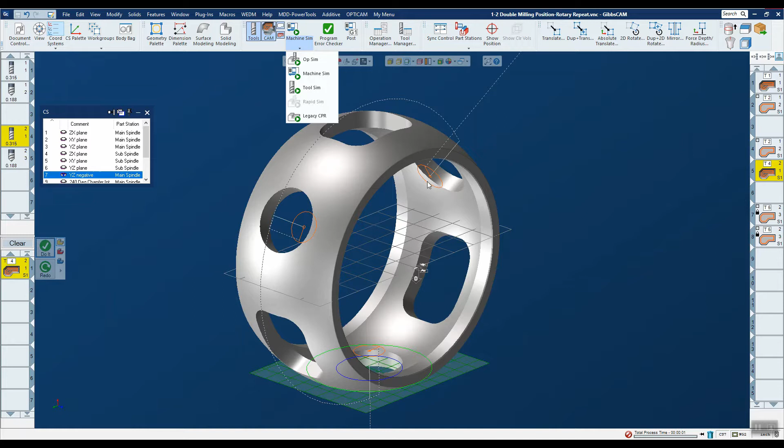Now in the same sort of way, I want to use the lower turret tool. So I'll drag that tool down onto the same process. This time I'm going to be using the opposite coordinate system, the YZ negative one that's defined here, and again make sure that I'm specifying that correctly. Now I'm going to pick the circular pocket geometry using the profiler as before. Okay, so now I've got that duplicated in multiple places as well.

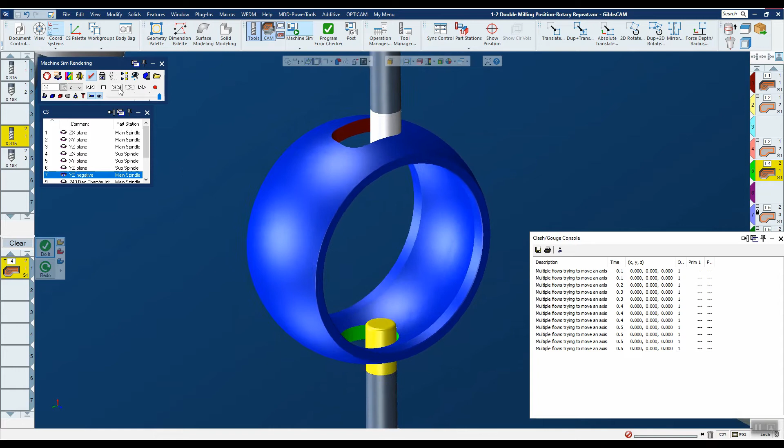Let's go into our machine sim. I have a stop put in, so let's quickly go to the area where we could potentially have some problems. You'll notice that we are getting errors in the console. What's happened is the first circular pocket is done; the top one is not. If I step through, we see the tool retract out of the circular pocket, and now it's going to index to the next circular pocket position and start that. The problem is that it's still machining up here, so the tool is going to crash. This is obviously not an acceptable situation.

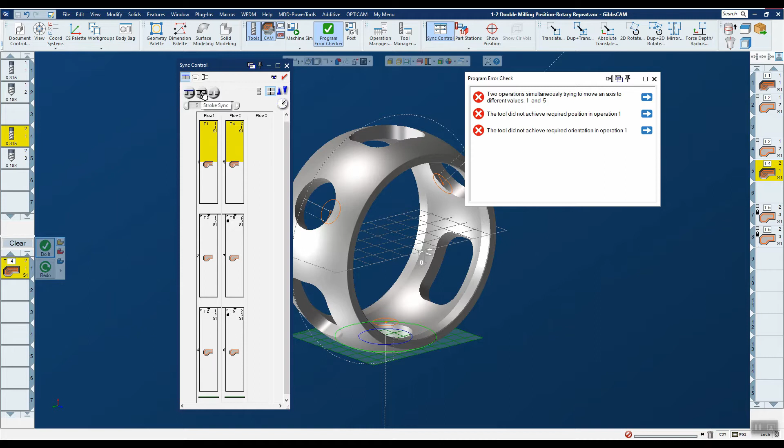So what do we do? Well, we have our sync control here. You'll notice that it is giving us some error messages. What we want to do is select the top portions of each one of these operations that I just created and put in what's known as a stroke sync. You'll notice that all the error messages go away. What it's telling it is that if one pocket finishes before the other, wait until the other pocket is done before you index to the next position.

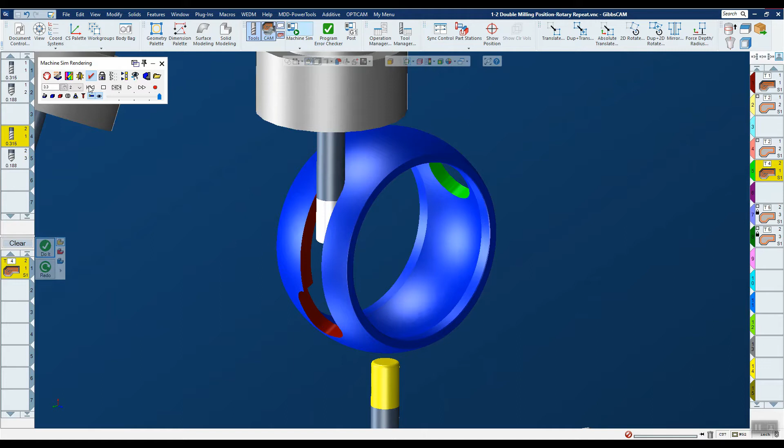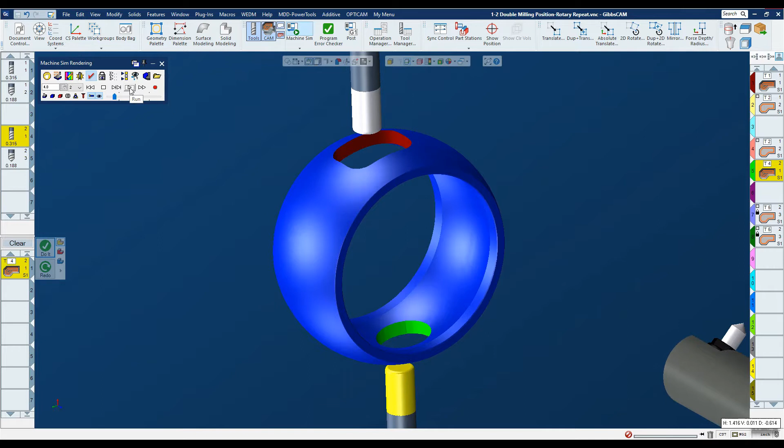Let's go back and see what happens now. I'm going to rewind my machine sim, go very quickly to the area where there's potentially a problem, and step through again. You'll notice now that it is holding on the bottom. As I step through here, the rectangular pocket finishes out. Let's slow this down a little bit and play it, and you will see the same sort of thing going on for the other 2 positions. So that sync control removed the crashing error that we saw before.

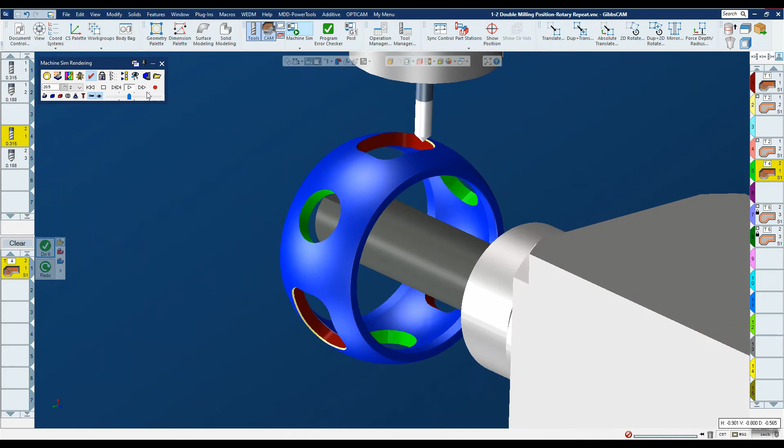By the way, other operations were done here for contouring to do the chamfering on the top and the bottom, as we see here, but the same principle was applied with the sync control. Okay, so that's the end of this example.

Let's go to another example. We're going to use a different process here: polar and cylindrical milling, mainly to demonstrate that this sync control principle can be applied for different kinds of operations. Let's start out by getting some geometry. We're going to do this slot here and the bottom slot here live so you see the entire process happen. So I'm going to turn on my edge selection and pick some geometry here.

And let's extract that geometry. All right, we have that all done. And I want this geometry to be relative to the YZ plane as the last example. And the YZ negative, we want some geometry that belongs to that as well. But let's start here on the top. So I'm going to pick this geometry.

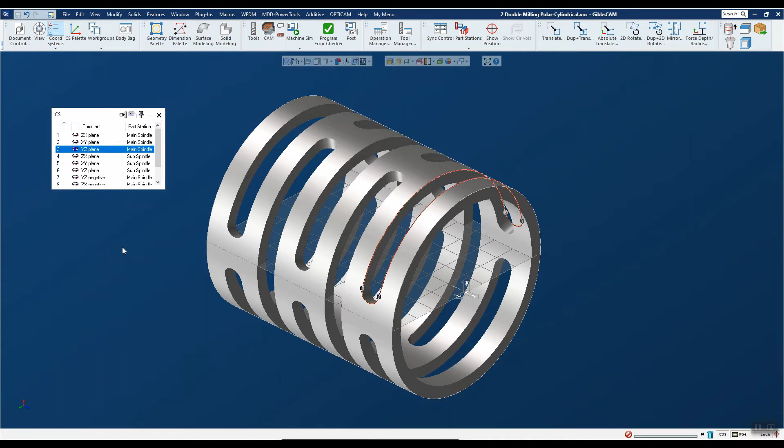And I'm going to go ahead and say, let's unwrap this. Okay, so when you unwrap it, you are essentially flattening it out. I want to do one other thing with this geometry. I want to split this line right down the middle so I have a good start point for this geometry. And that's a standard plugin called GeoEdit Split. Split it right down the middle. And now the geometry looks good.

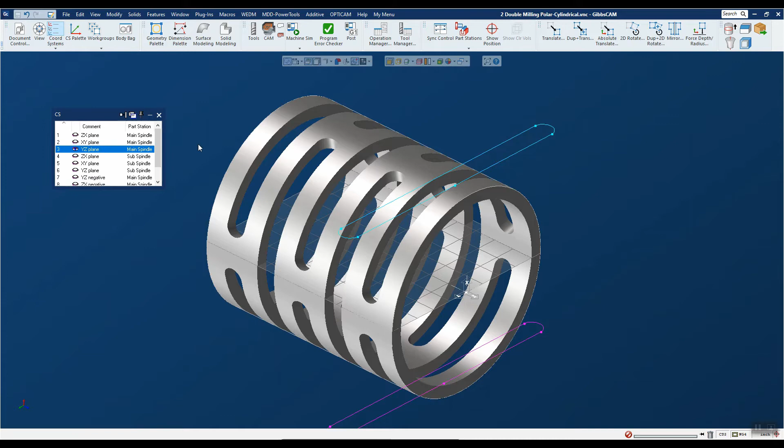I want to get the same geometry down here on the bottom. So a quick way to do that is with duplicate and mirror. Again, a standard function. And in the same sort of way, I want this now to belong to the bottom coordinate system. Great. So now we have our geometry all set for the top and the bottom for our polar and cylindrical milling.

So I have two tools. As before, identical tools in the upper turret and the lower turret. Tool number 1, tool number 6. We're going to start with tool number 1. This time we are going to do a contour instead of a pocket. And again, you put in some good values for both clearance planes and the top of the cut and the bottom of the cut as before. That's all standard stuff. Very important that we are machining from the correct coordinate system. So that's all set up.

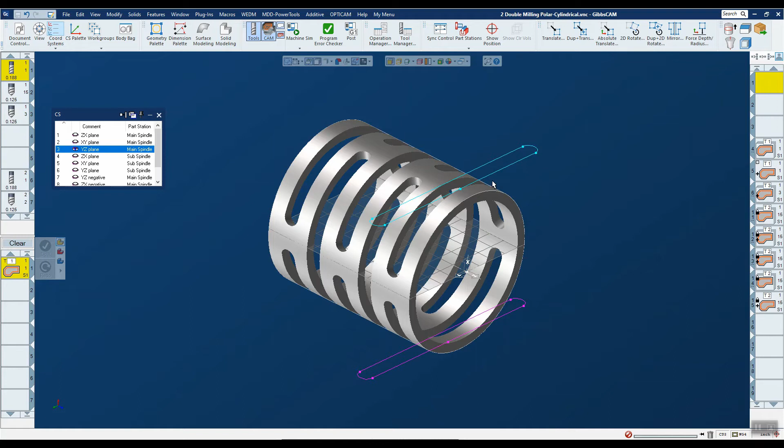What we need to do now is pick our geometry. And again, I want to make sure we start right at that point. We are going to be doing a climb cut on this. And you can see that because we picked the polar and cylindrical milling option, it wraps it around that cylindrical shape according to the depth that we specified.

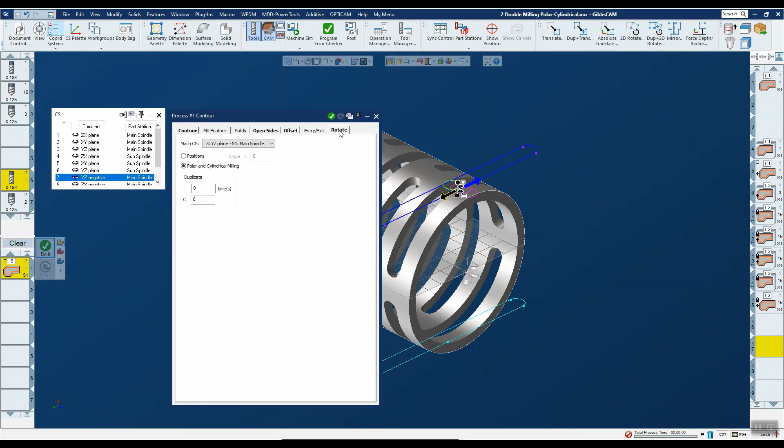In the same sort of way now, I want to do it from the bottom. So I'm going to activate that coordinate system. And we're going to use the bottom tool, tool number 6. I'll drag that onto the same process. These values should still be good relative to the bottom. Again, I do want to make sure though that I pick the correct coordinate system, and as before I have specified polar and cylindrical milling so that it will do that wrapping for me.

And in the same sort of way, I'm going to now pick this bottom geometry, and I'm going to go in a climb cut relative to the bottom as well, and select that. Looks good. Let's go into sync control. Sync control is telling us we have some problems. So we're going to do the same thing as before, put in a stroke sync. You'll notice that removes all the error messages.

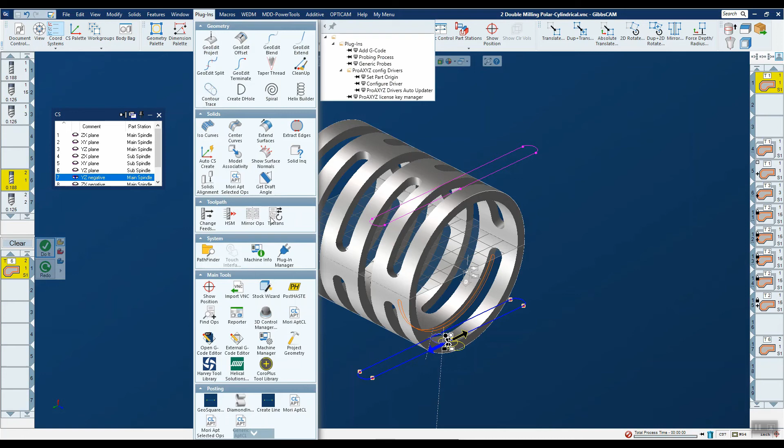Now we want to do one other thing, which is we want to duplicate these toolpaths. You'll notice that we have similar slots, in fact, identical slots on the top and the bottom in 2 more places. These are spaced 1 inch apart from each other. So I'm going to use a standard plugin called TP Trans to go ahead and duplicate that twice, -1 for the first set of ops, and again for the second set.

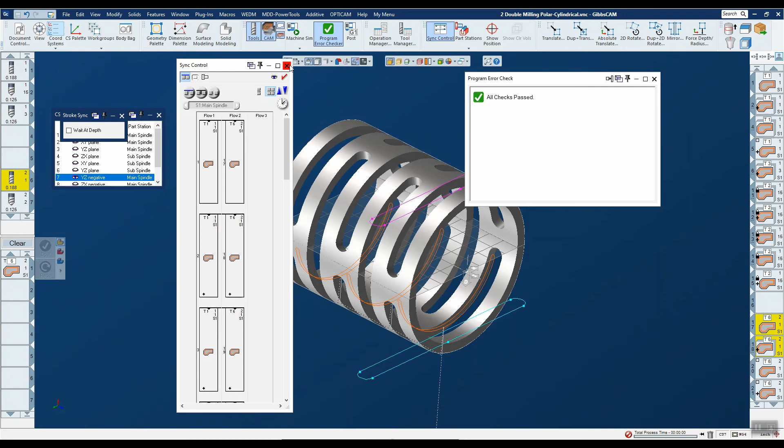Okay, let's go back into our sync control. More error messages, right? Because I have to put these syncs in now for these duplicated ones as well. Once I do that again, it removes all of the error messages. So we should be good there. Let's go into our machine sim and see what's going on. So now you see we are coming in from the top and the bottom simultaneously.

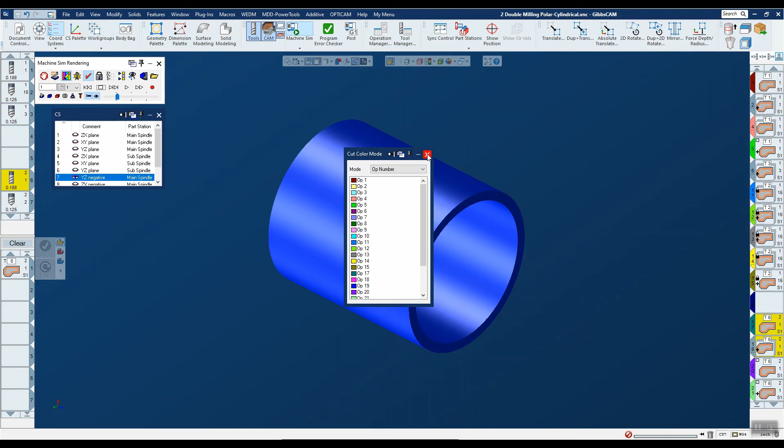Right. Let's go and step this back. Let's do the same thing as before. Let's add a little color to this so we can see that the one on top will be red, and the one on bottom will be kind of a fuchsia here. And let's run this. So it's looking good, all nice and synced up. I have a stop in there. So let's go beyond that.

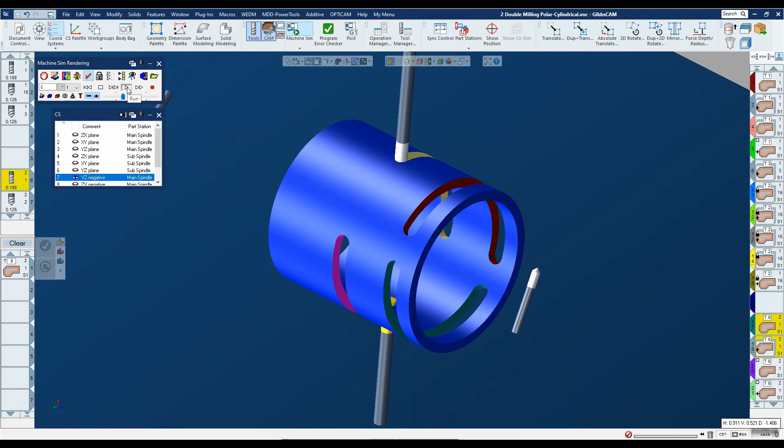Now we see our duplicated toolpaths, which of course should run exactly the same since we put syncs in for them as well. And then there were some other ops made here for the other slots that are again symmetric about different planes. And as in the last example, we also do some chamfering on the inside and the outside. So obviously these are synced as before.

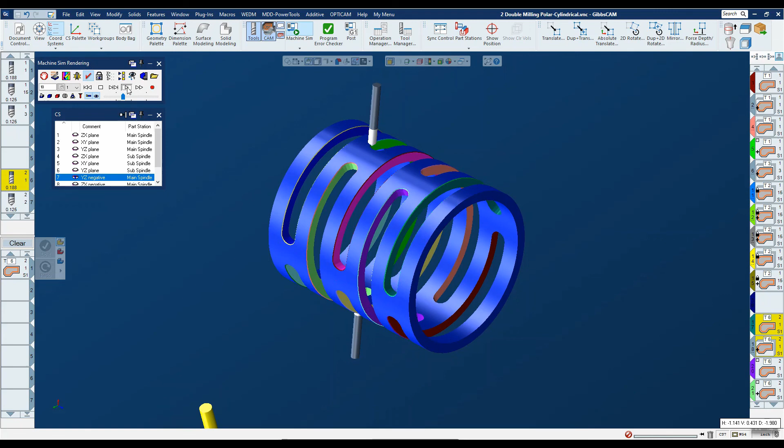And then we'll also see that we do some inside chamfering as well. So that's double milling, new in GibbsCAM 14, analogous to pinch turning that we've had for a while, very useful.